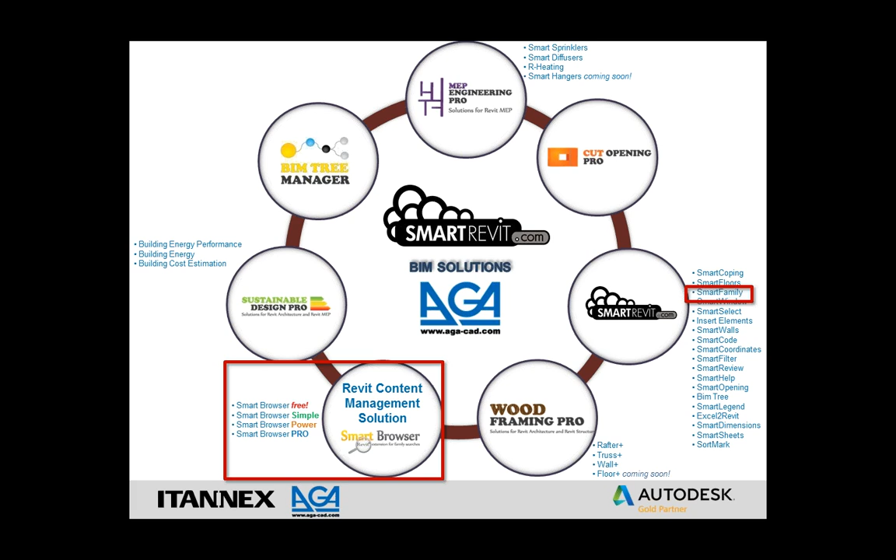So first, if we look into the free version and the Power and Simple versions, all of those 3 products allow designers to quickly and easily browse and find Revit families from the library. It's very easy to take families from the library, get information about the families, about parameters, parameter values, and put that family into the project. As you see from the dialogues, the free, Power and Simple versions are very similar, just the Power and Simple have the additional possibility to check and update families from the library, so it finds the differences between families in the library and families in the project. Later I will show you how it works.

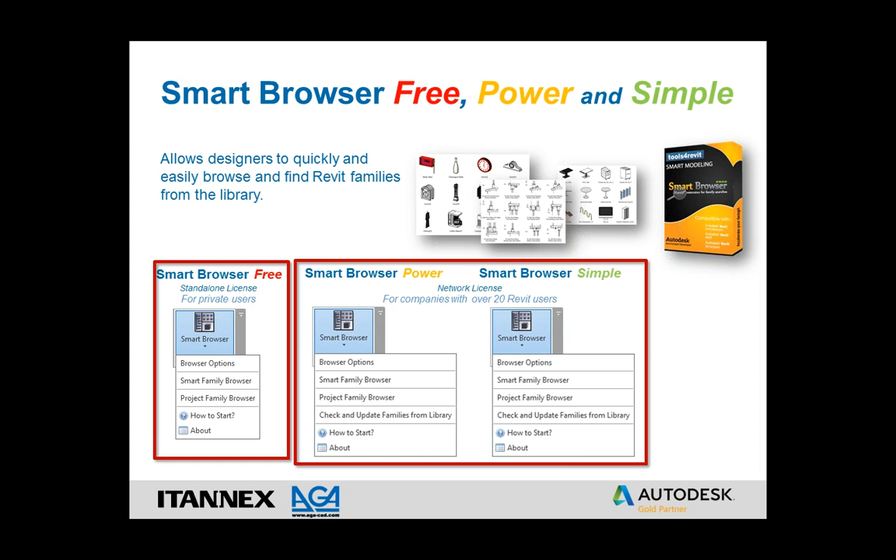So the free version usually goes for standalone users and private users. The Power and Simple versions go for companies, where we have network licenses, so you can do network installations and use network licenses.

Now with the Pro version, you can do all the same things as with the regular Smart Browser, just with the Pro version you can also manage your families. So you can search and manage your families at the same time. You can add additional parameters, change the values, change the types, add formulas, and delete families from the library. So with this product you can very easily find the families in the library and manage them.

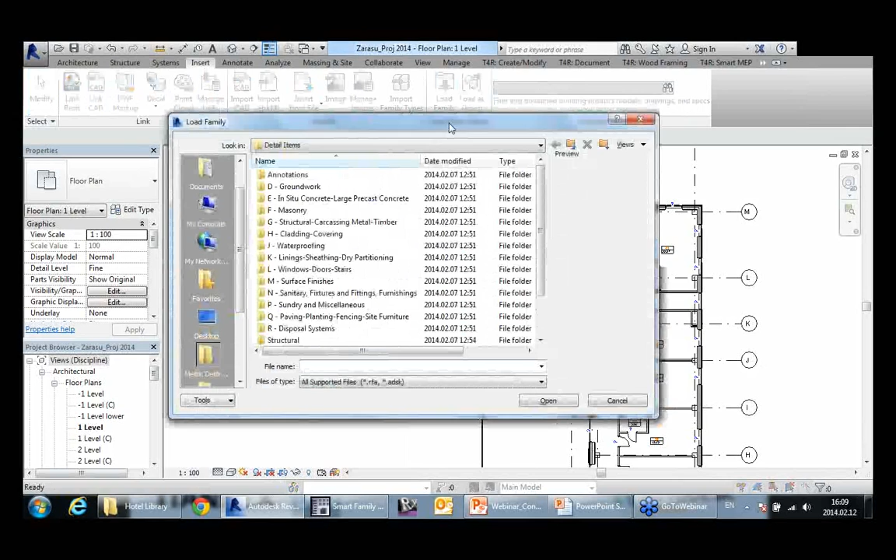Now I'm coming into my Revit. Usually when you start working with Revit and need to insert additional families into your project, you have to go to Insert, Load Family, and select the library you want to analyze. Usually in this dialog, all the families are grouped together according to the catalogs, and you just need to go through the catalogs and find the families.

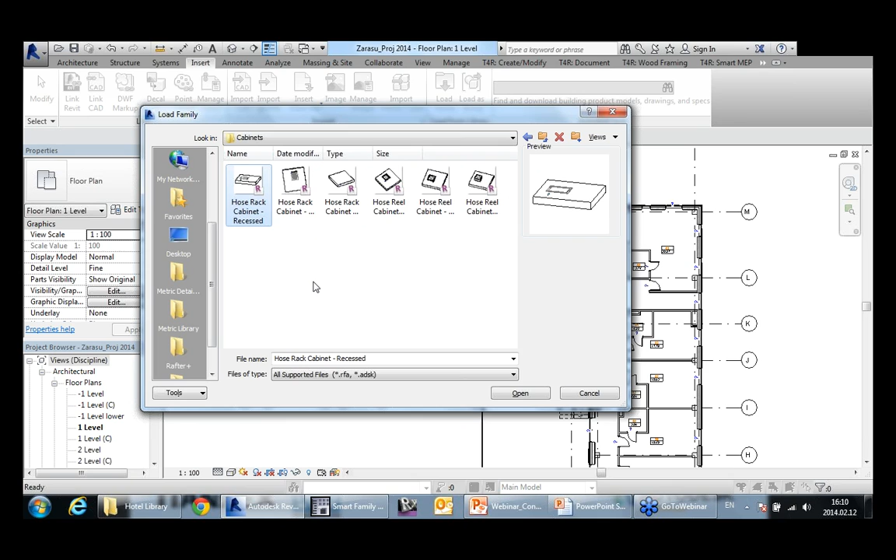Sometimes it's very difficult to get information from the family. You can see only the name of the family and the picture, and that's it. You can't know all the information about the family, about the parameters used in the family, about parameter values, about the formulas, about the host of the family. So instead of that, we suggest having a smart family browser where you can go through the library.

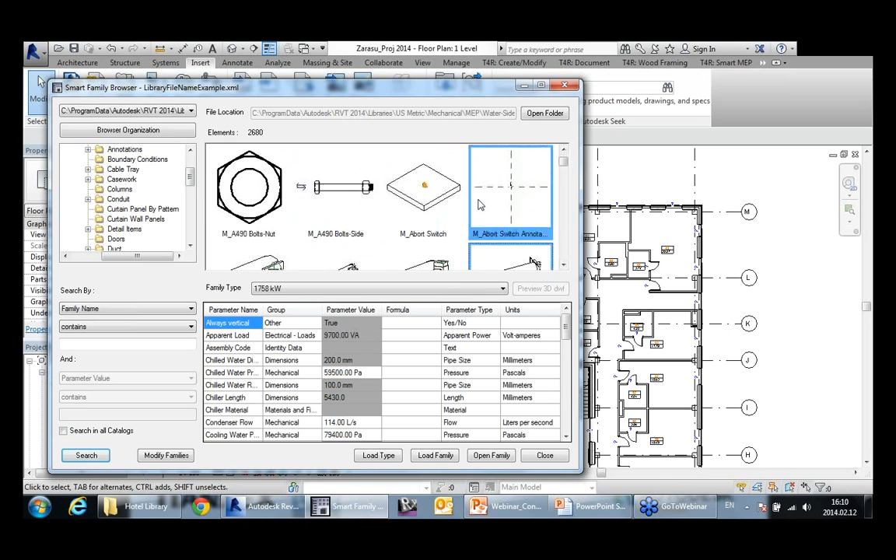Then you can find the elements, and at the same time you can check the family types that are created in the family. You can check the parameters, the groups and parameter values. If there are formulas assigned to the family, you can also see that here, the same as parameter types and units.

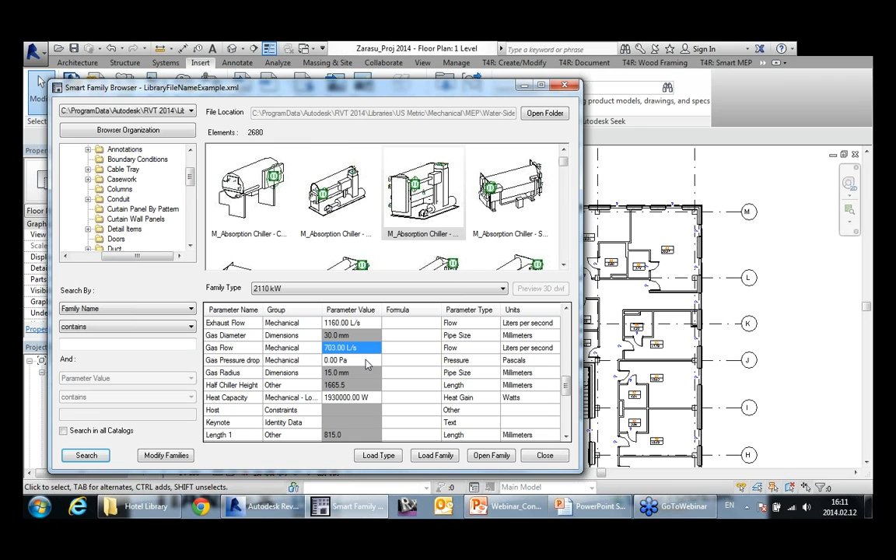Also, if you see that the cells are displayed in gray color, then you know that this value is a type value. If it's white, then you know that this is an instance value, and you will need to change that for every instance used in the project.

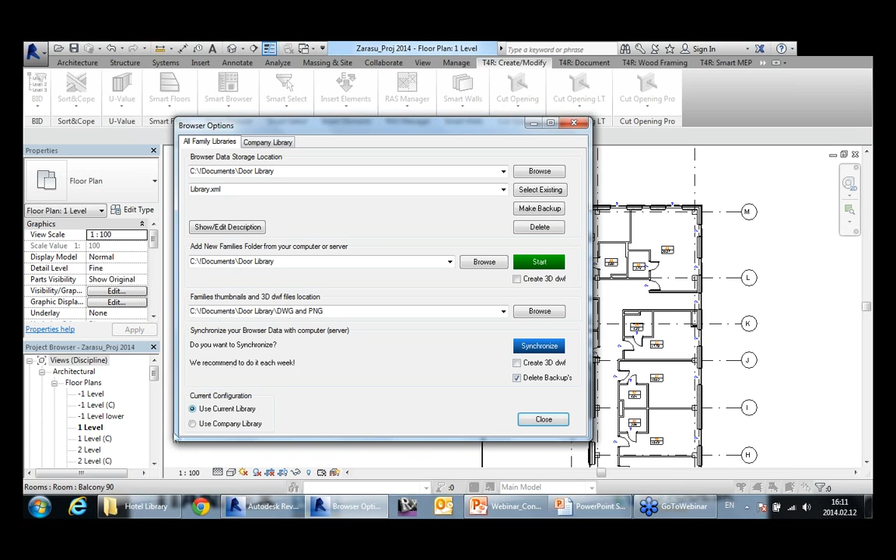So now let's start from the beginning, and I will show how to prepare such a family. Smart Browser Pro you can find in a separate tab, and first we have to go into the browser options. Here you have to say where your library is located. In my catalog here I have about 16 or 17 families, and let's try to prepare those families to use them with the Smart Browser. So here you have to select where your library is located.

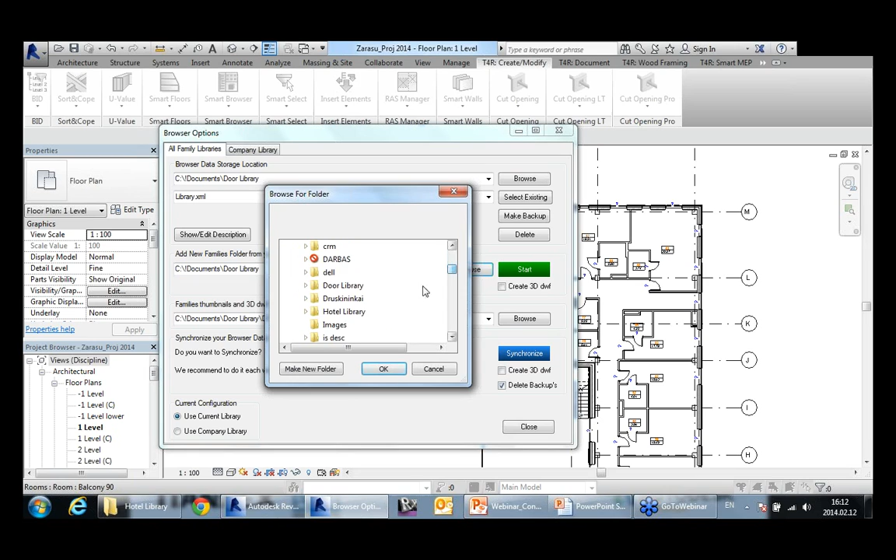Okay, then actually the main button is Start, and after pressing the Start button, the tool will open every family and read all information about the families. That information will be stored in an XML file, and right now I will copy the path to that XML file. The tool will create that XML file, which will have all information about your families, about parameters, parameter values, and so on.

Additionally, the tool will create additional PNG and DWF files. So here you also have to say where those additional files will be stored. Actually, it can be in the same place, or you can create an additional catalog if needed.

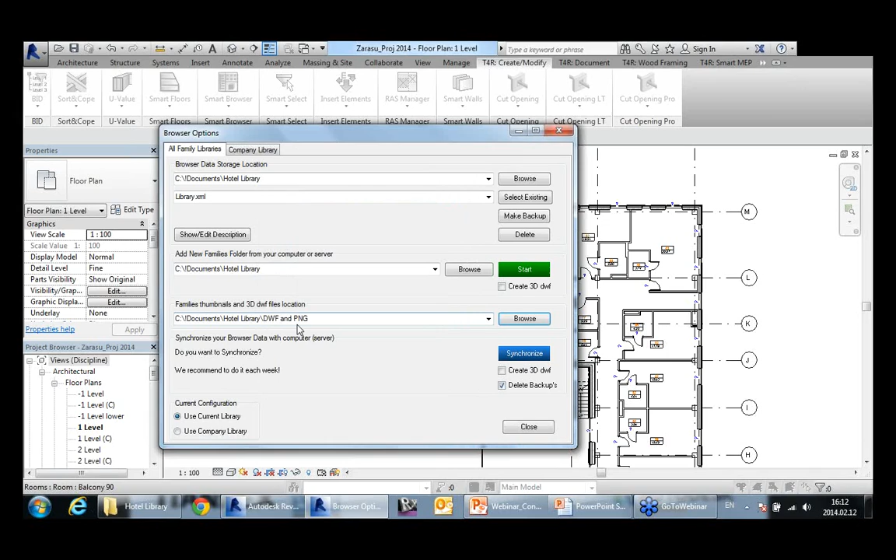You can manage those files wherever you want. You can put together with a library, and save that somewhere in a common location.

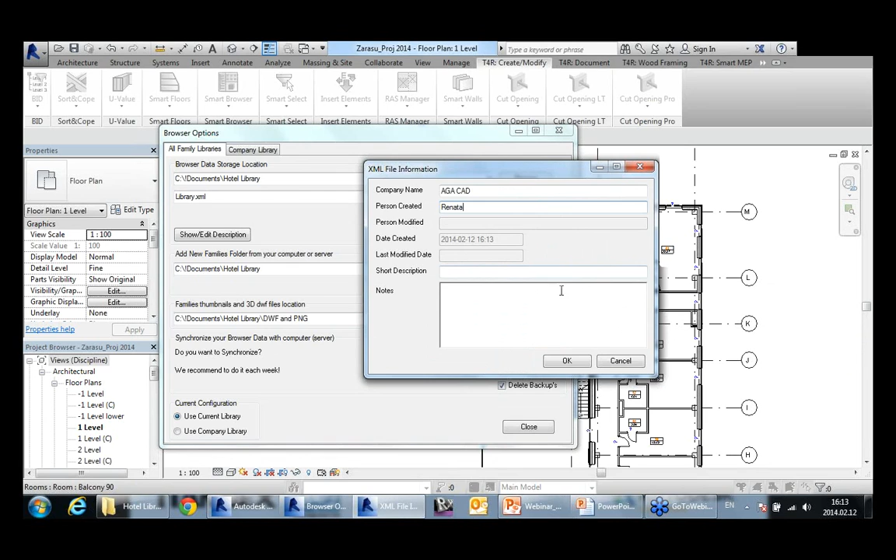After pressing Start, you just have to add the company name and the person name who is trying to create that XML file. After pressing OK, the tool will read all that information about the families.

That process can take some time because the tool opens every family and reads all information. But this process has to be done just one time for one user from the company, so you can leave it running overnight or over the weekend. Just one user from the company has to do that process.

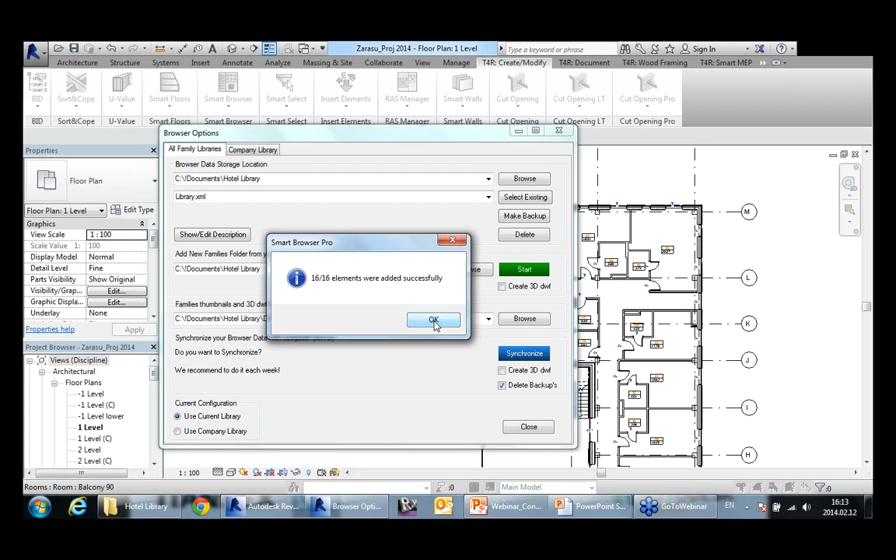All other users can use the same XML file, so it can be shared and stored in a common location. When we are done, we can go to Smart Family Browser and see the content.

We have all those families prepared in the Smart Family Browser, and as you see here, we can get really nice views along with the parameters and parameter values.

If you add additional families to the library, the tool will let you know and give you a message. You will need to press synchronize, and the tool will synchronize the data for you. That process will not take a long time.

That process will be quite fast because the tool will look into the families that were added or modified.

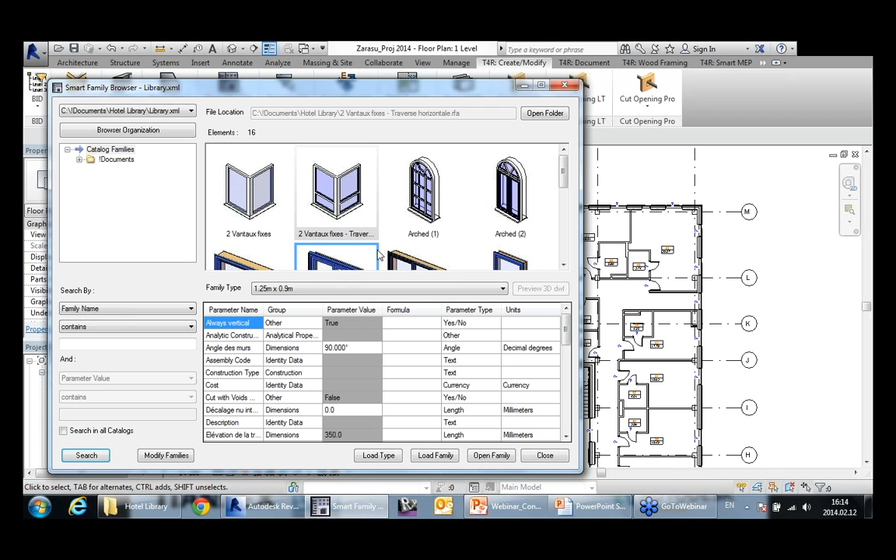Now let's look into the left side of the tree. Here you can see the catalog system as you usually see it with Revit families, but at the same time you can change that setting.

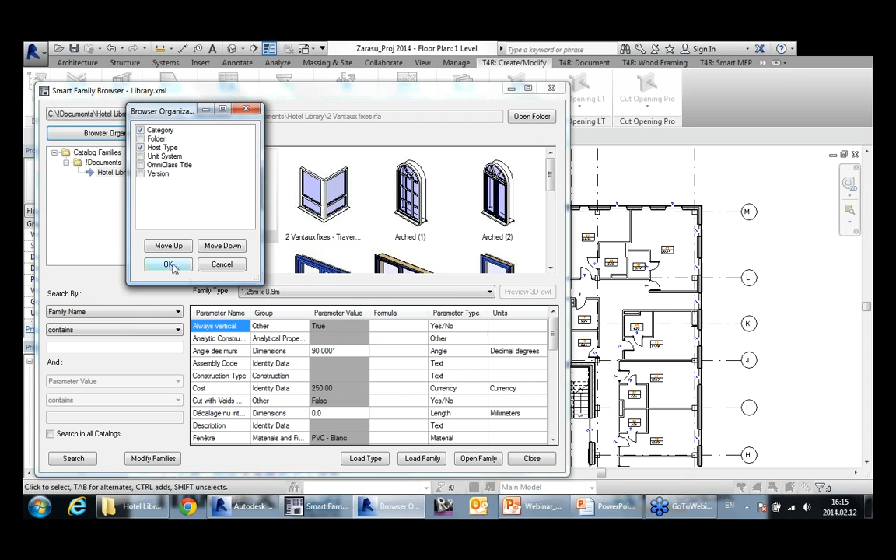You can say you would like to see the category and the host type, or the version, or the unit system, grouping your families according to different scenarios. Right now the tool will group our families according to the real category and then the host of the family, so you can check and see what are the hosts of those families.

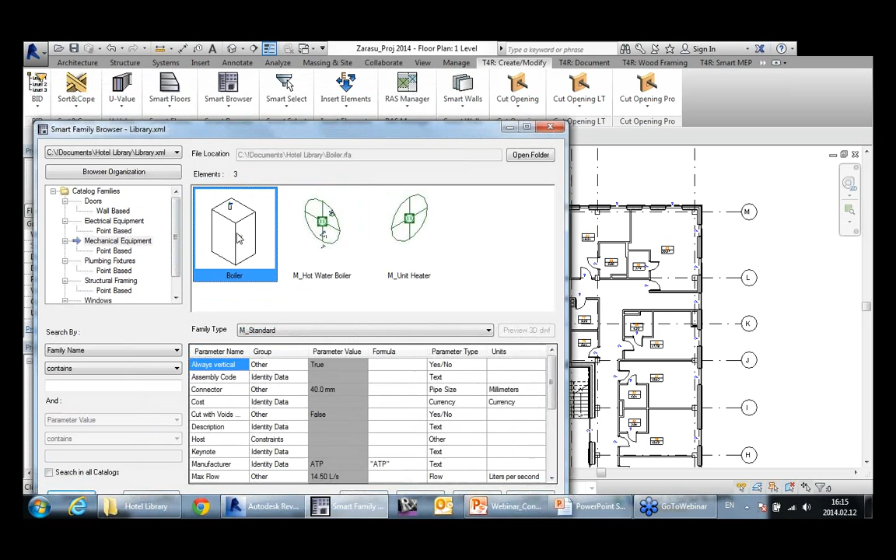When you decide this is the right family and you really want it in your project, you just need to drag and drop to load the family into the project, and it will be automatically selected so you can place it where you want.

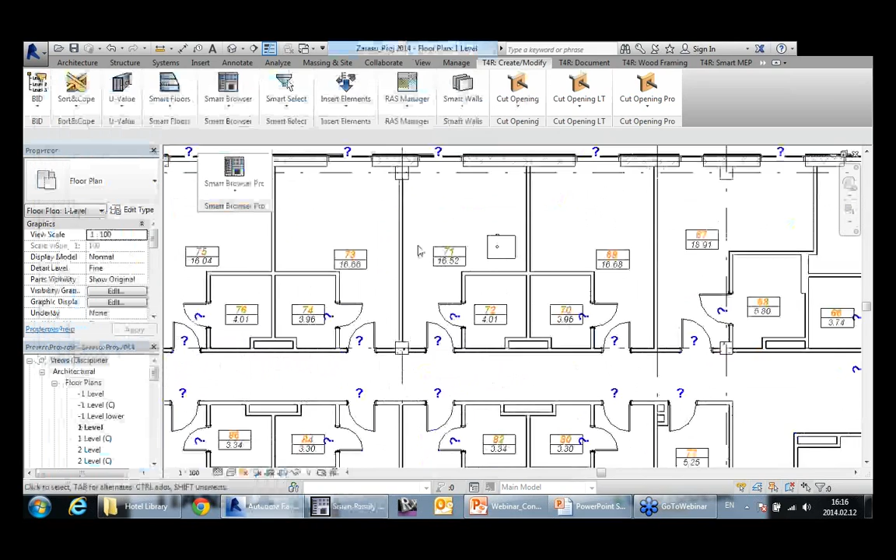What's good here is that Smart Family Browser works like an external application, so you don't need to close the dialog. You can come into the project, work with it, and then continue working with the Smart Family Browser.

Now you can have several libraries. Like in my case, you can have several directions into different libraries. If you have a really huge library, you can split it into separate XML files, or one XML file can have several libraries, several directions into different libraries.

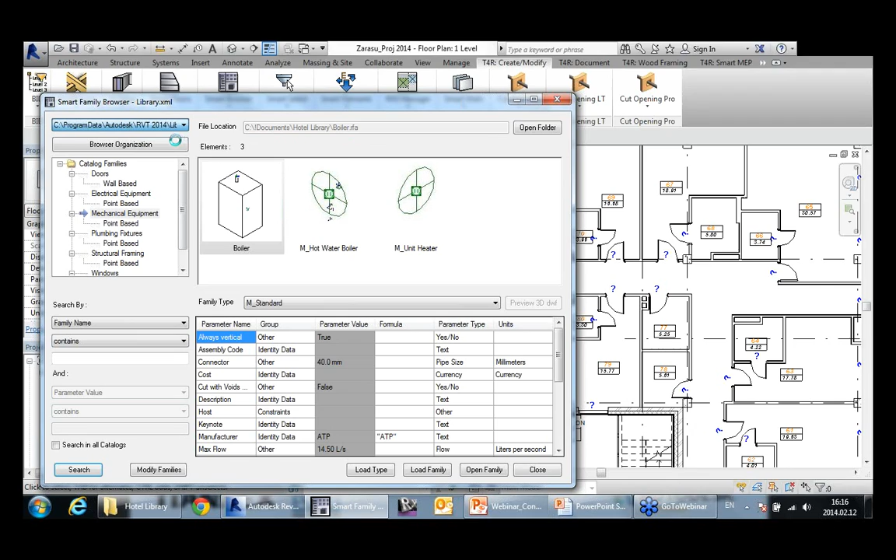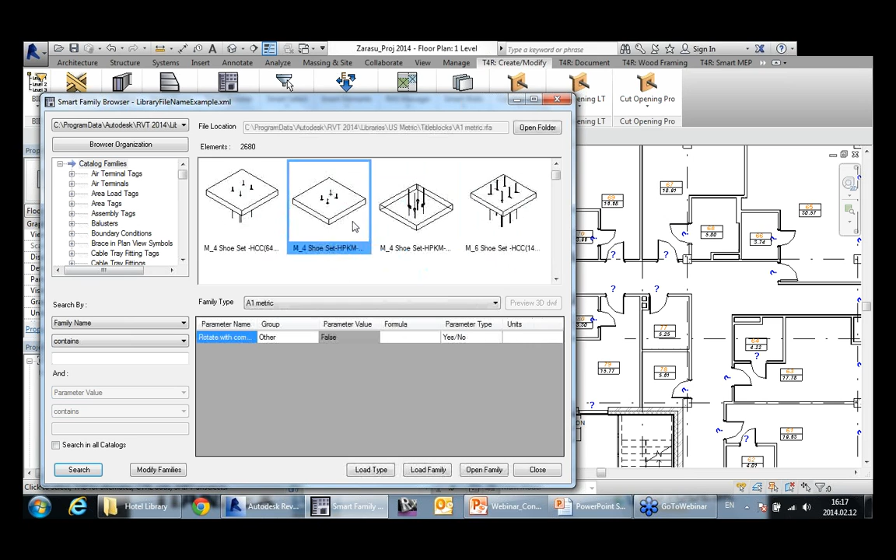Let's look into the Revit library. It has about more than 2,000 different families. Okay, so it's 2,680 families. Again, you can go through them here.

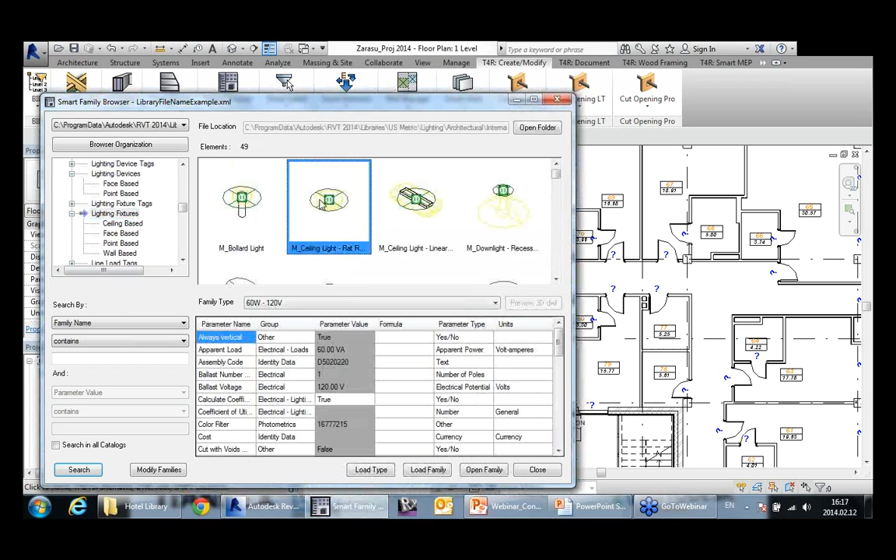At the same time, you can see that the tree was automatically changed, and now you can really look and filter just the elements you want. For example, here we can get lighting fixtures, and here we can see 49 lighting fixtures.

At the same time, you can filter ceiling-based, face-based, point-based, or wall-based families. Because as you see here from the picture, you will never understand that this is really a wall-based family, or for example this one or this one. So with this tool, it will be very easy to know what is the host of the family.

At the same time, you can make an additional search. You can search your families according to family name, family type, parameter name, or even parameter value.

So we can make a search according to parameter name that contains 'material,' and parameter value that, for example, begins with 'metal.' And we can make a search in all the catalogs.

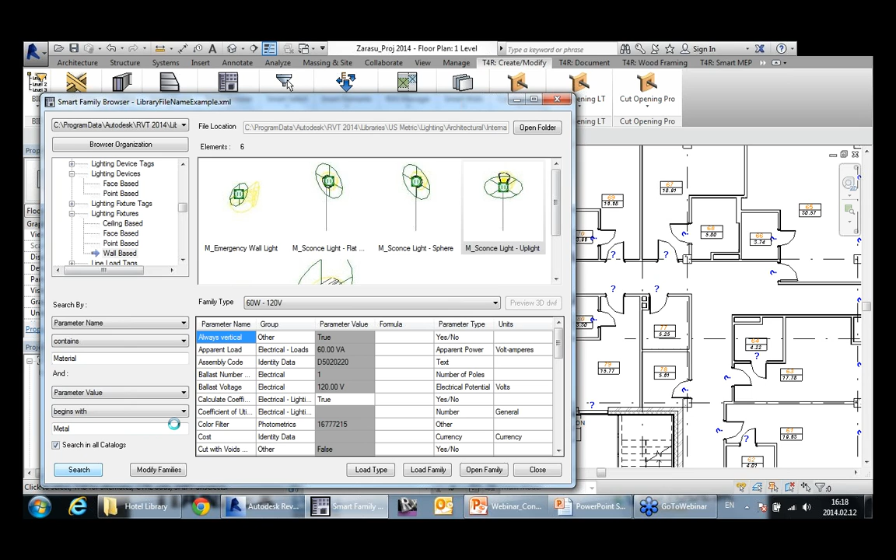We found 162 families, and exactly the tool found elements that contain parameter name 'materials' and begin with the value 'metal.'

So all those features that I'm showing you right now, you can find with all the browsers. It doesn't matter if you use Smart Browser or Smart Browser Pro.

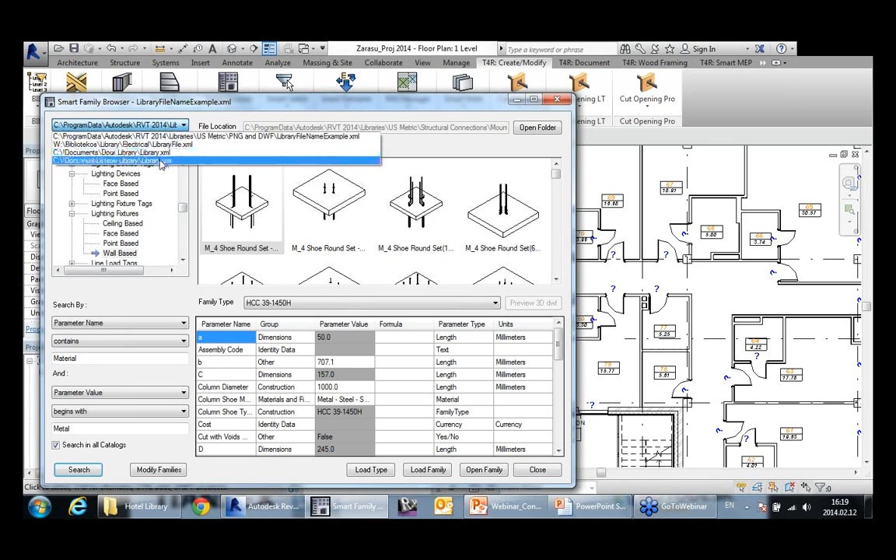Now, with Smart Browser Pro, you can modify the families. It has the possibility to go with right-click and modify the families.

So let's select those families. Let's go to Modify Families. Here we have to add a modification name.

So we are adding the modification name and the person name who is trying to modify those families. If you want, you can add an additional short description about the modification you're planning to do, or short notes.

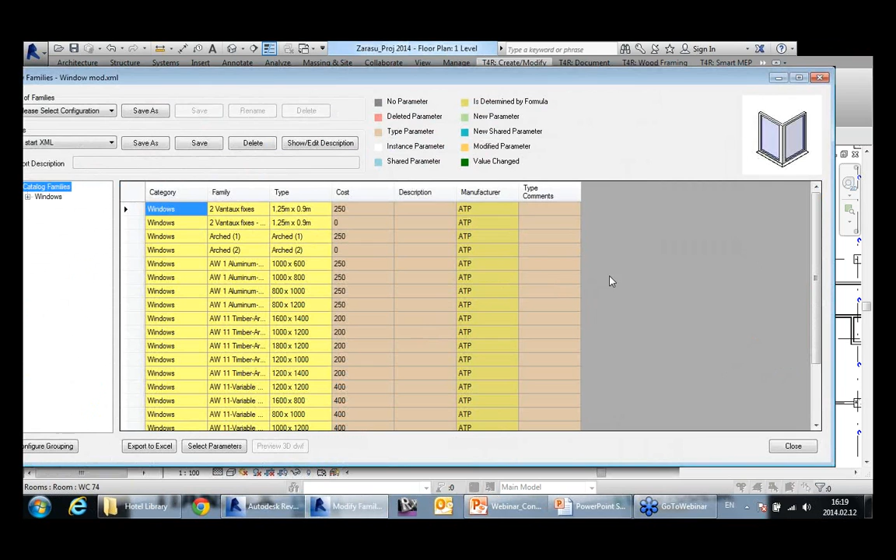And that's it. Here we have the families listed in the separate dialog. Every type will be displayed as a separate row, and in the columns you will see parameter names. Default names will be like cost, description, manufacturer, and type comments.

If you're not satisfied with those parameters, you can go to select parameters and switch on or switch off the parameters you want. On the left side of the tree you will get the list of all

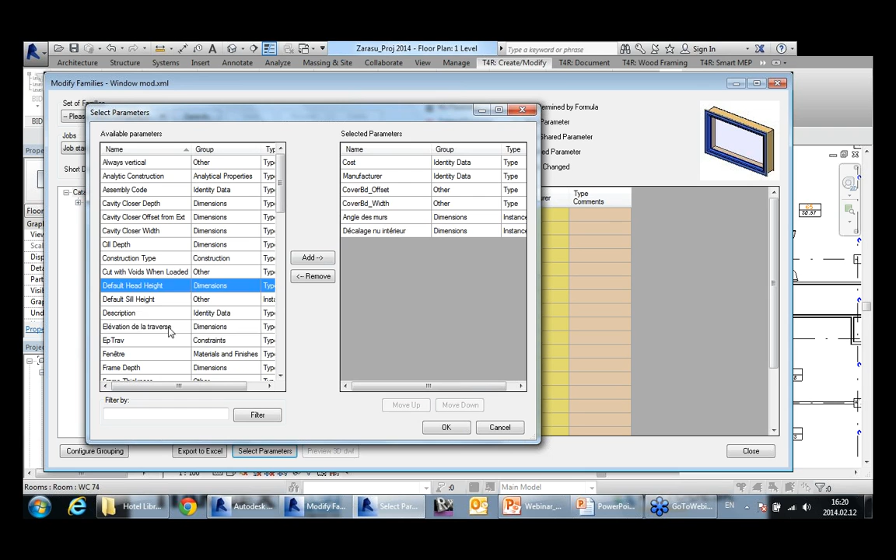parameters that are already used in those families. So you can select parameters, just click OK, and then you will get the situation with those families. It will be very easy for you to understand what's going on with the families.

If that cell is displayed with a gray color, then you know there is no such parameter in that family. If it's displayed with this color, then you know this is a type parameter value. If it's white, then it's instance. If it has a yellow color, then you know this is a parameter that has a formula value. And now you can make changes.

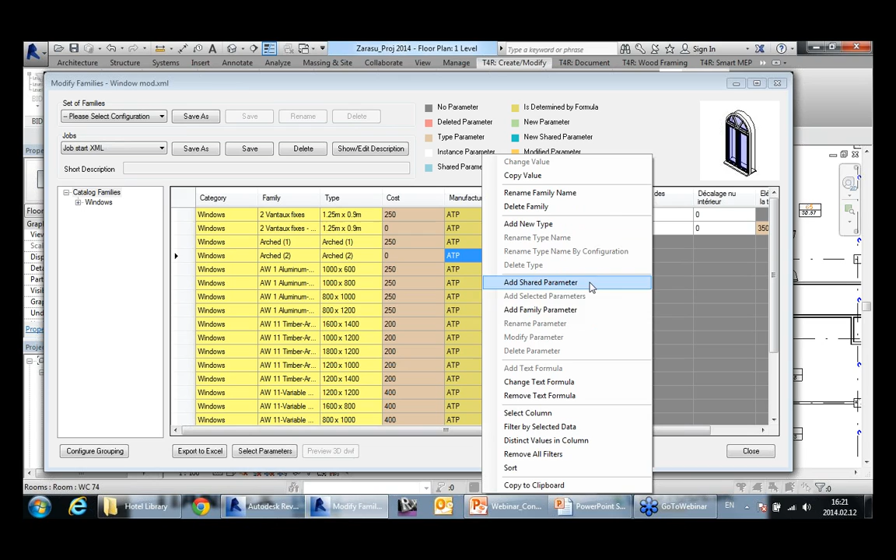You can find all those possibilities with the right-click menu. You can change the values, copy the values from one column to another, rename the families, delete the families, make changes with the type names, add additional parameters, modify them, or even delete them.

Let's say if we don't want to have this parameter here, we can go with right click and say we want to delete such parameter. It will automatically be shown with the red color, so we added a task to delete that parameter.

At the same time, you can make a filter. You can filter the families according to the family name or category, or you can make a filter with right click. You can select the values here, filter by selected data, and then you will get only filtered families, and you can change the value.

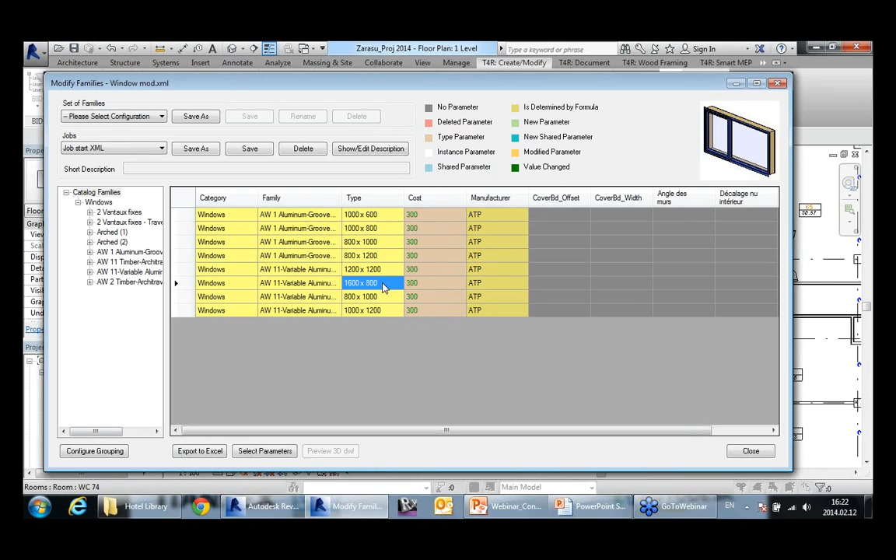So right now, physically, those changes are not done yet. We are just adding the tasks of what we would like to do with the families. In the show and edit description, you will get very detailed information of what changes you are going to do with the families.

Later, we will need to run the process and the tool will change those families physically. Right now, we are just adding the tasks of what we want to do with the families.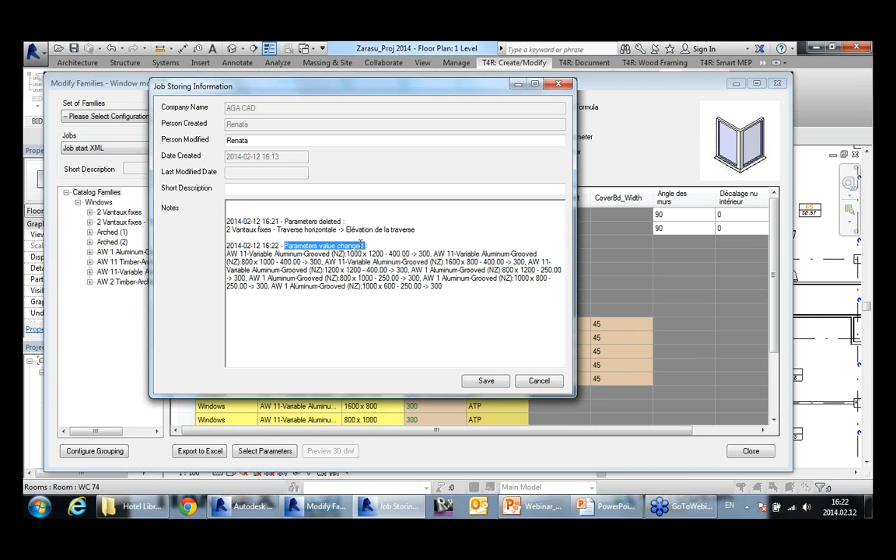So as you see here, we decided to delete the parameter, and after a minute we decided to change the values for those parameters and for those types. So every time you can see what tasks you are adding for your families.

Let's say if that parameter has to be instance, or you want to modify such a parameter, you can go to modify parameter. You can say that this parameter should be instance, or if you want you can change the group of that parameter.

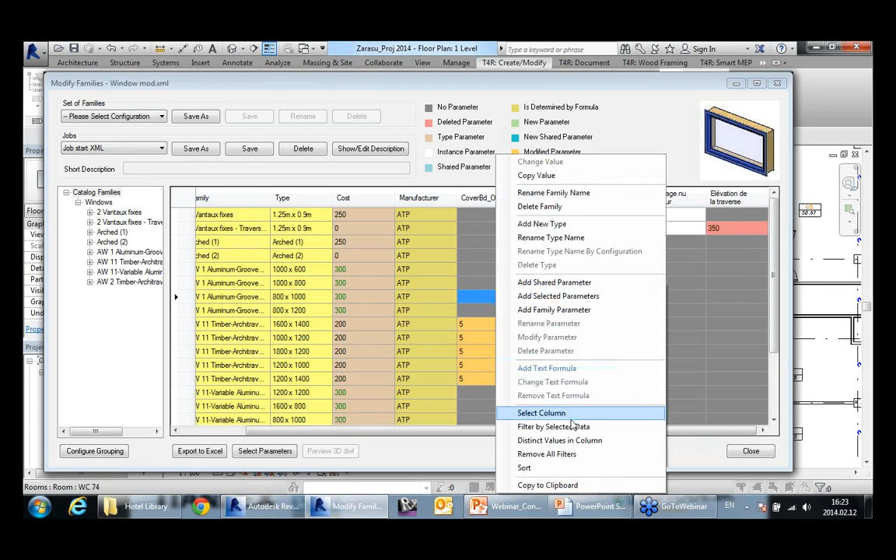Then we can add additional shared parameters. We can filter, select all those families, go with right click, and here we can add additional shared parameters. Here we have to select a shared parameter file, a regular TXT file with shared parameters.

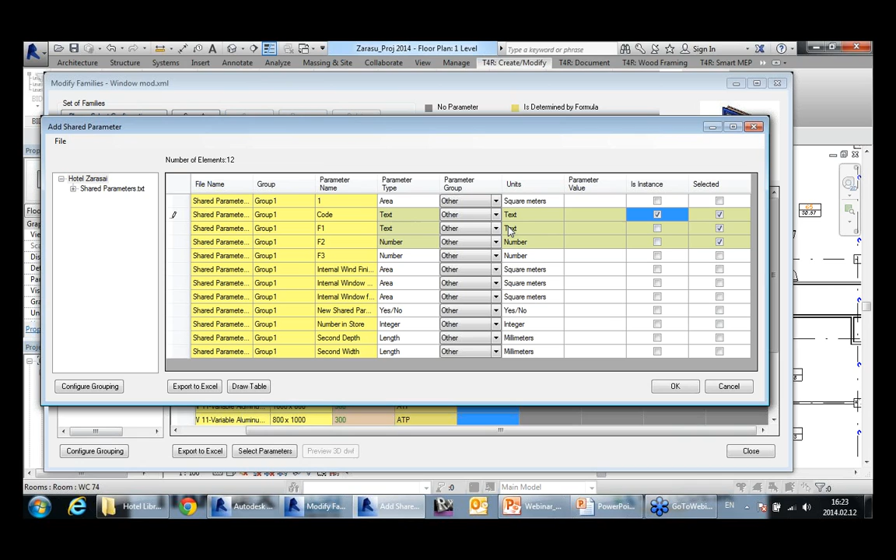And you have to pick the parameters you want to add for your family. For example, this one will be instance. Again, if you want, you can assign additional groups of parameters, and the tool will create those 3 new shared parameters for every family.

At the same time, we will change those values. So with this dialog, it will be very easy to make a standard for your families and to be sure that everything is okay with the families.

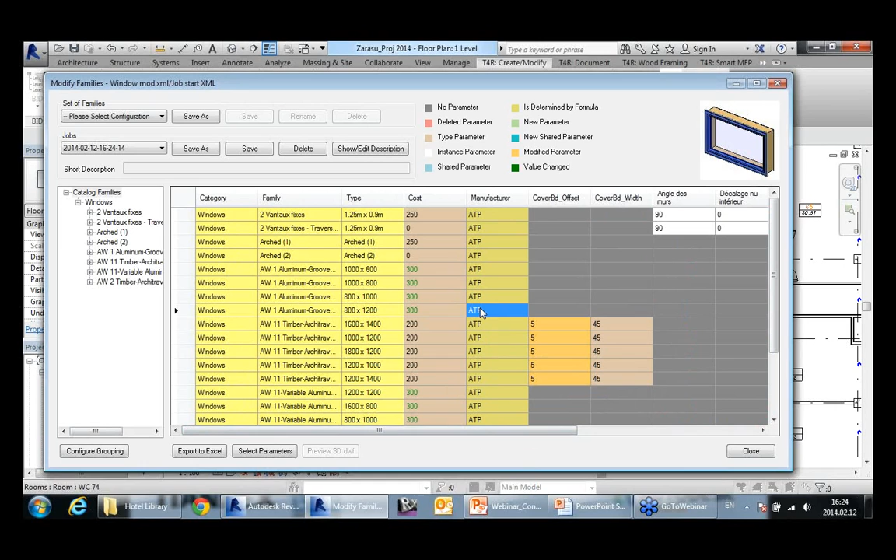Now I will add width and height values, width and height parameters.

Okay, and as we see, here we can check, because we can see the whole situation, whether the family's width and height values really suit the type names. Sometimes if you want to make a standard, it's very difficult because you have to do that manually one by one.

Here you can just make a rule, and assign parameter type names. Actually, if you want, you can just create a new parameter, or just rename the type name. But here I want to show a new possibility we added to the new version of Smart Browser Pro, where

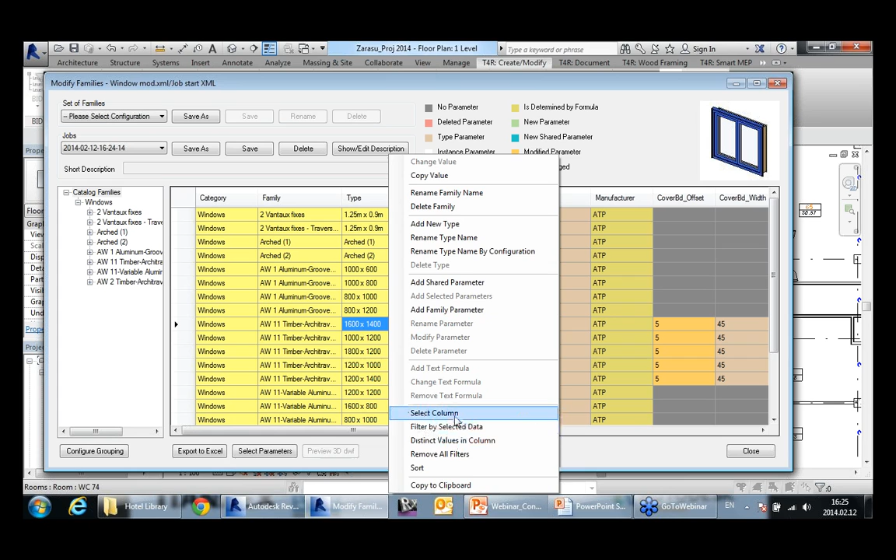you can rename types according to configuration. So I can select all those families, go to rename type name by configuration, and here I can add a configuration for how I would like to create those type names.

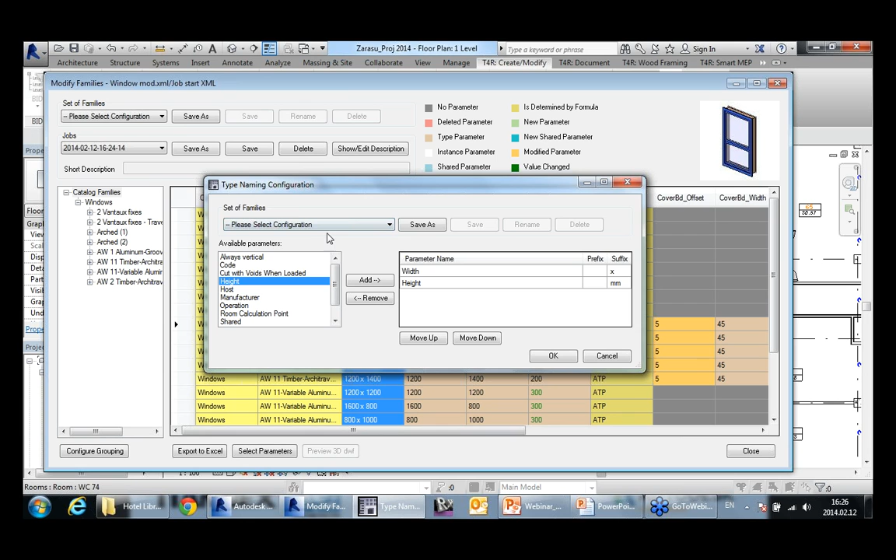Let's say it will be the width, then a suffix like a space, then an X, then space and millimeters at the end. That will be a rule for creating my new type names. Again, you can save that configuration for the future if needed. After pressing OK, the tool will rename those type names according to the width and height values.

So as you see, it will be very easy to make a standard for the type names, and you will not need to do that manually one by one.

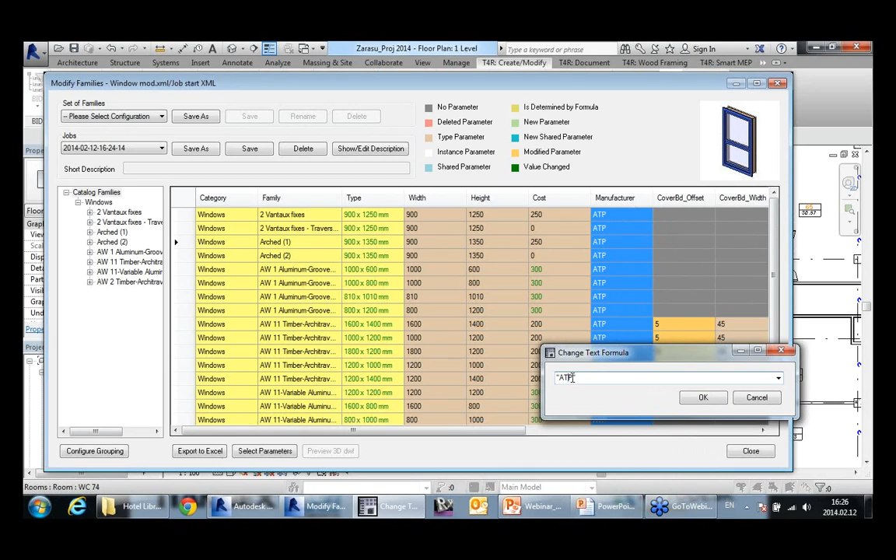The same with the formulas. Right now, this value was created according to the formula. We can select those, go to change the text formula, and here you can assign your own formula for the text.

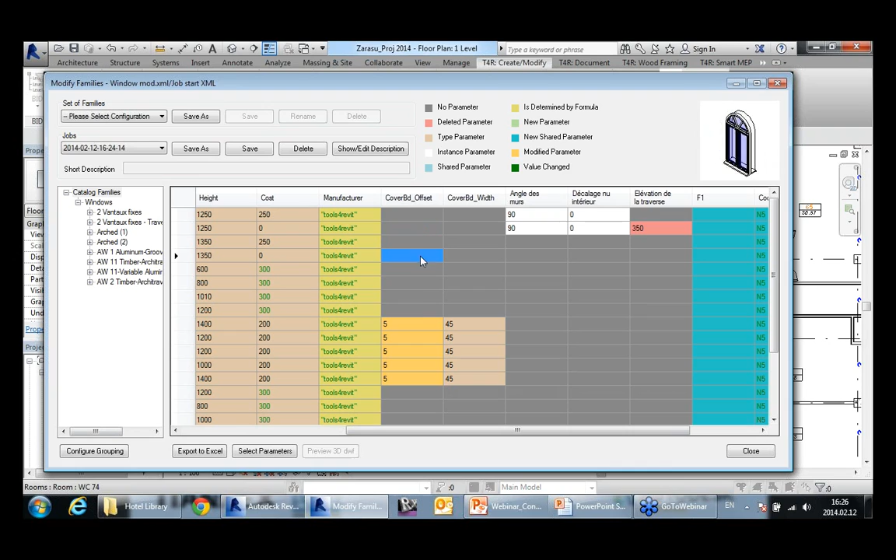So after adding those tasks, one more example I'd like to show is if you want to have those two parameters in those families also, you can select those parameters, press right click, and press add selected parameters. The tool will create new parameters for those families, exactly the same as in those families. So it will be very easy to make a standard and be sure everything is okay with the families and they have all the same parameters and parameter values.

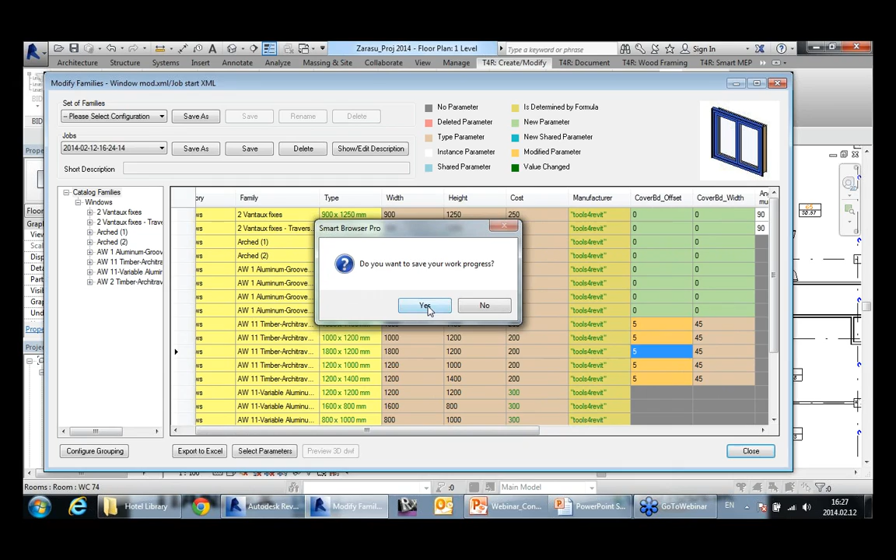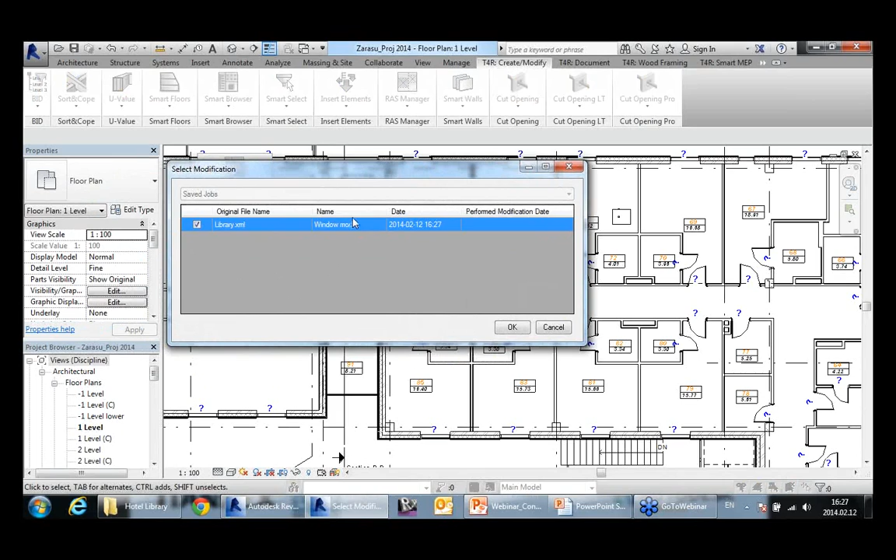So that's it, we can close the dialog. We will save all that process. We can close this dialog as well, and we can run the process. Before that, if you want, you can come back to your modifications, but right now we can just go to run saved modifications. We have to select the modification name that we did before. Right now there's no date here because we didn't run that modification yet.

After pressing OK, the tool will open every family and do those modifications for us. So as you see in this dialog, the tool is saving and changing those families, because it's also making a backup file.

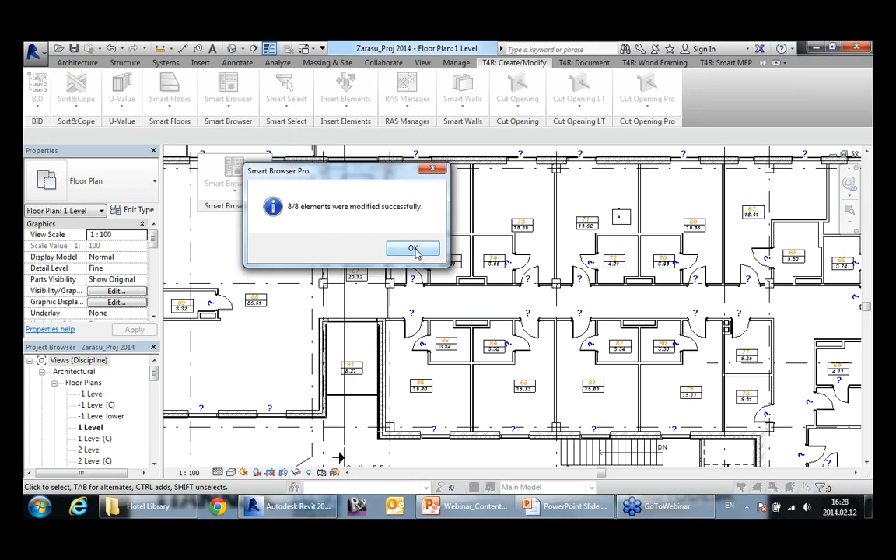Okay, so we're finishing with those families. There are 8 families modified in the project, and we can see that in our dialog, that we already changed those families because here we have the backup files. And when we come back or open the family, we can see those modifications and those changes.

Right now I will open Smart Browser again. Okay, and as you see, the changes are already here. So we can see that the codes, new shared parameters created. Actually, all new shared parameters will be displayed with blue color, so you know that parameter can be added later into the schedule or into the tag.

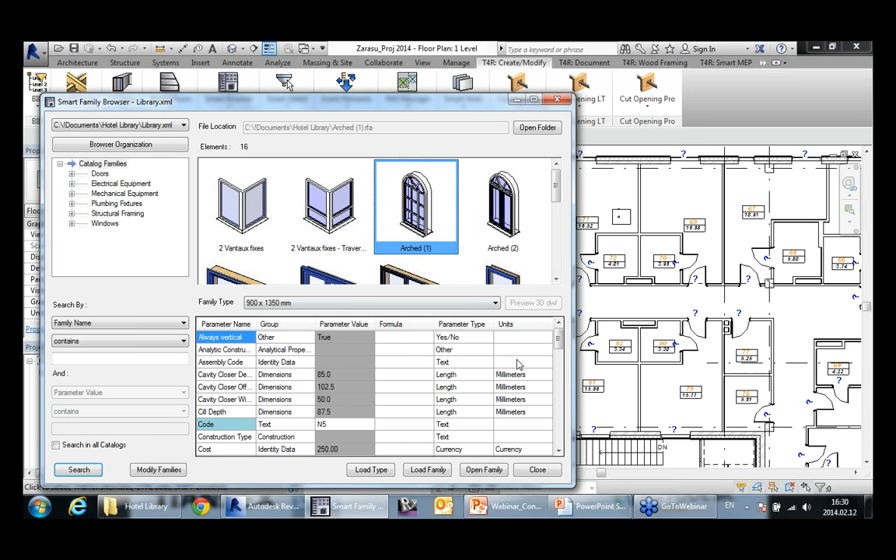So it is instance, displayed with white color, and there are also additional 2 parameters, and the formula was assigned, and the type name was changed for those families. So we can see everything is okay with the families, and you can use those families later in your workflow. And you don't need to make a synchronization process.

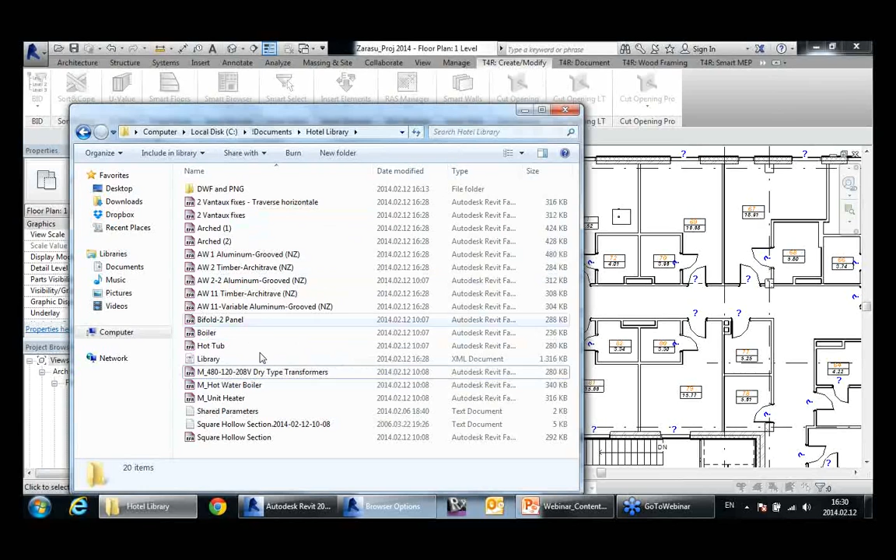Actually, if you are not satisfied with those backup files, you can come back into browser options, and you can synchronize the library with deleting the backup files if it's necessary. So the tool will delete that backup files, and that's it. We don't have them right now at all.

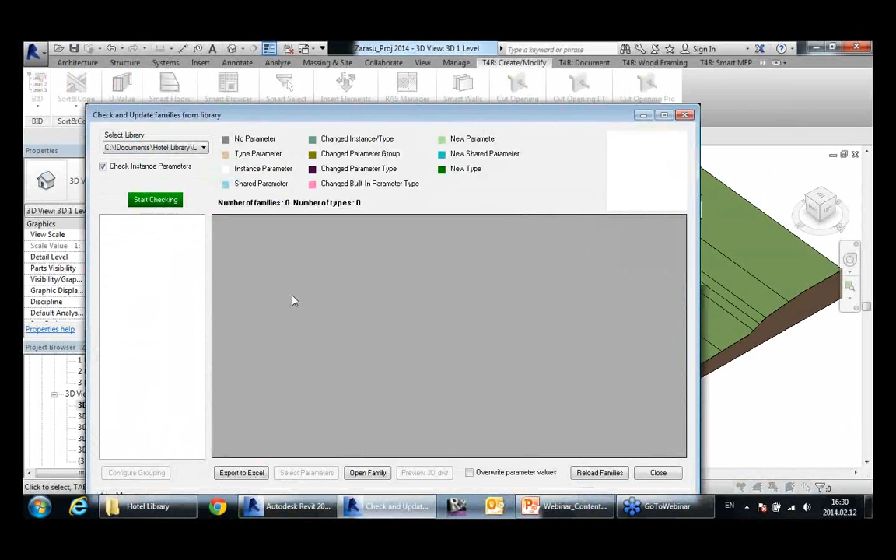One more feature that we have in Smart Browser Pro is that you can find the differences between your current project and the library. Let's say here I have the hotel, and I would like to find differences between the library and my project, because if you want to keep your families updated, you have to reload them into the project. We can select the library and just press Start Checking, and the tool will find differences.

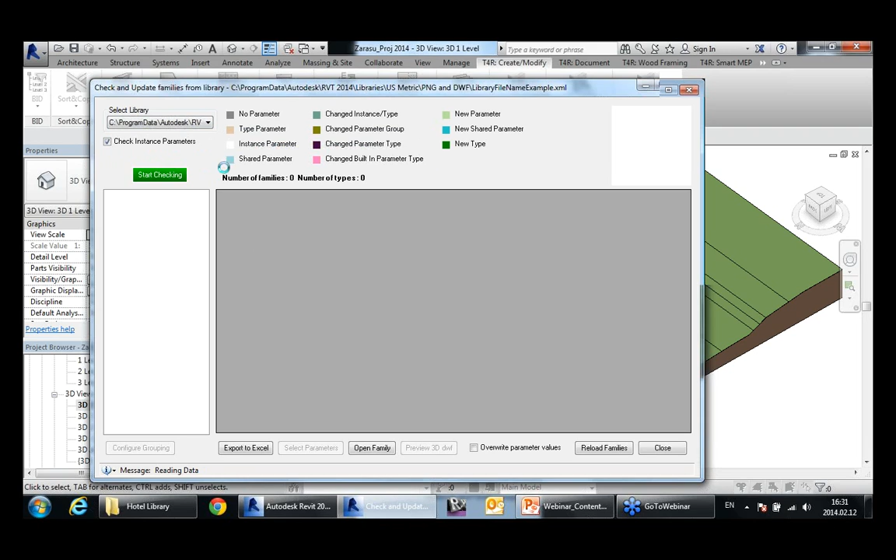Right now there are no differences between the current library, but let's say if I select this one, it's a Revit library with more than 2,000 different families. So after Start Checking, the tool is finding the differences between the current project families and the families from the library. And that's it, here we have the results. There are differences in 25 families and in 57 types, and with different colors you can see those differences.

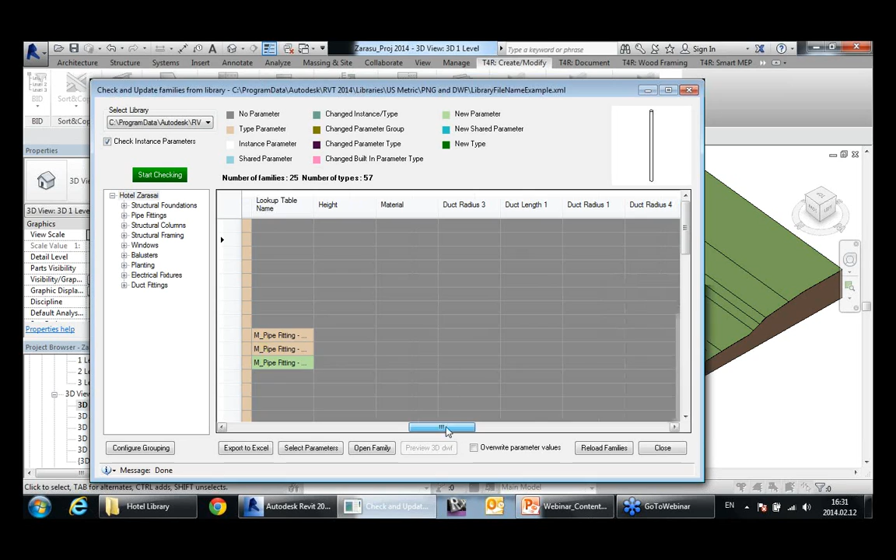And we can see that there are new types created or they are renamed. Also there are new shared parameters, and you can very easily find those differences between the families in the project and the families from the library. And then you can decide what you would like to do. You can overwrite parameter values if necessary, and you can reload the families to the project.

So right now the tool is loading the latest families into your project and changing the values.

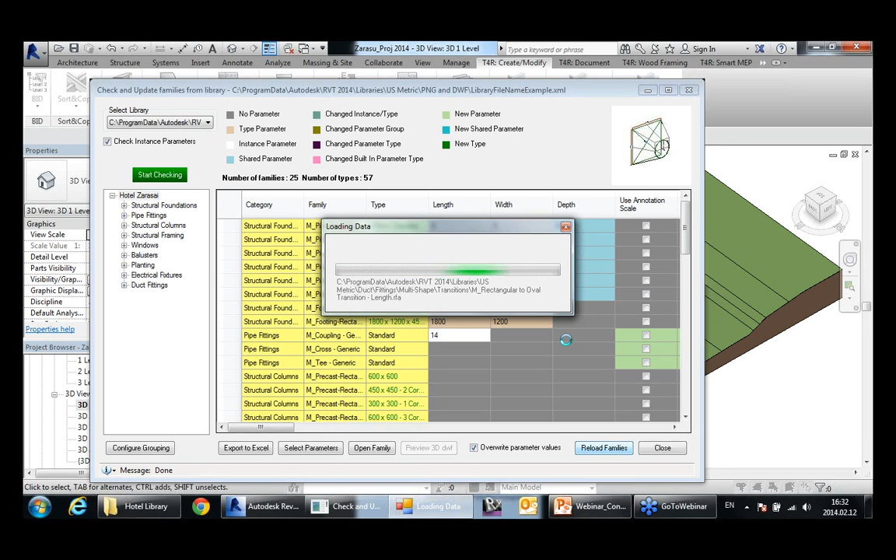Yeah, that's a lot. Right now, maybe some of the values aren't okay. This is a regular message that comes from Revit when you're trying to reload the families. So that's it, there are 25 families reloaded to the project. Now you can be sure that your families are really up to date.

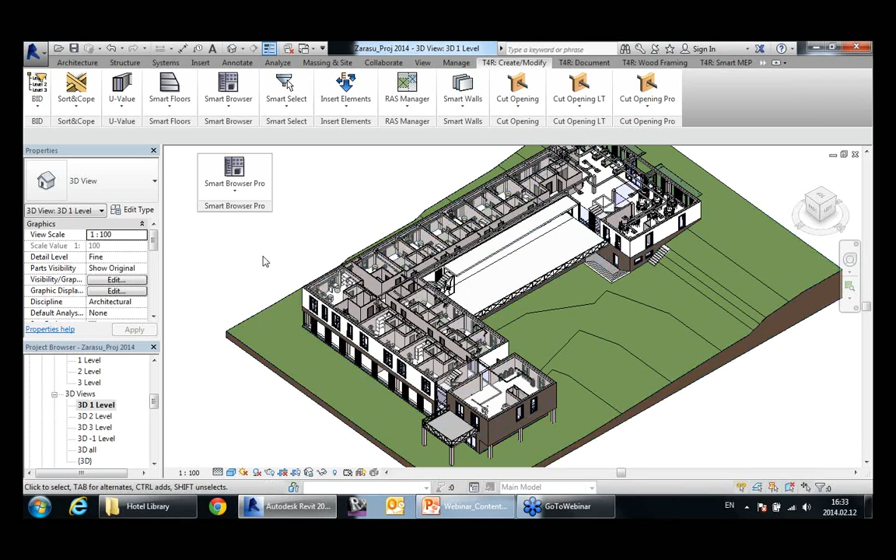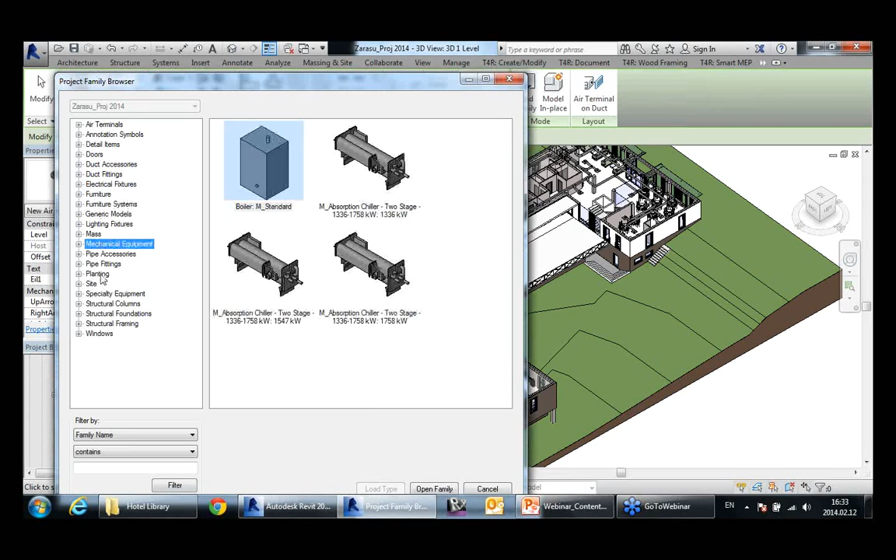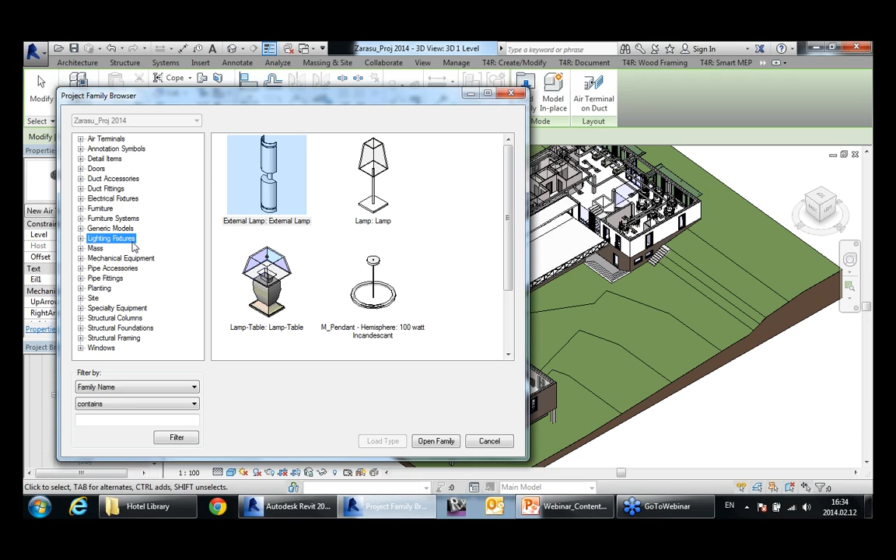One more feature I'd like to show with Smart Browser, or with regular Smart Browser Pro, with all those versions there is a possibility to see the Project Family Browser. This is one more browser that shows the families already loaded into your current project. Here you can easily find the families, and with this dialog it's easy to search by family name and type, and all those families will be grouped together according to their real category. With regular Revit all the families are under one component functionality, but here you can see the real categories.

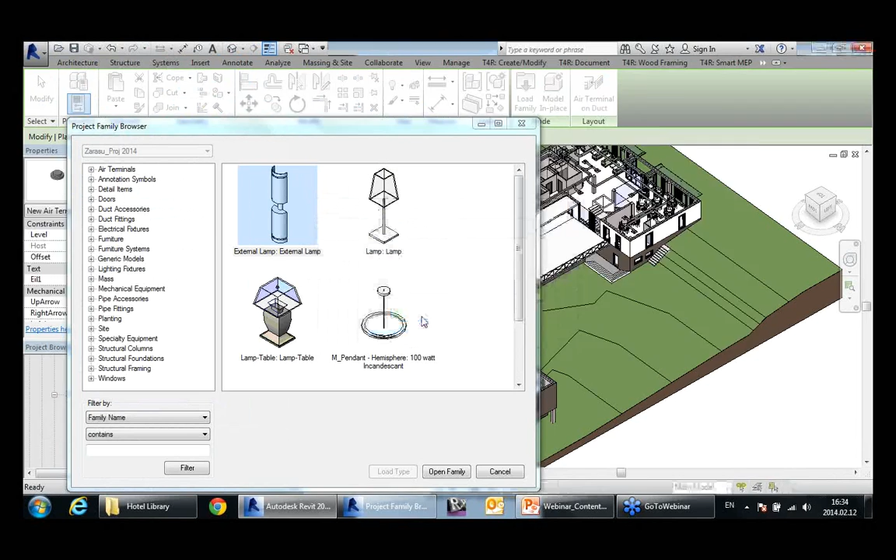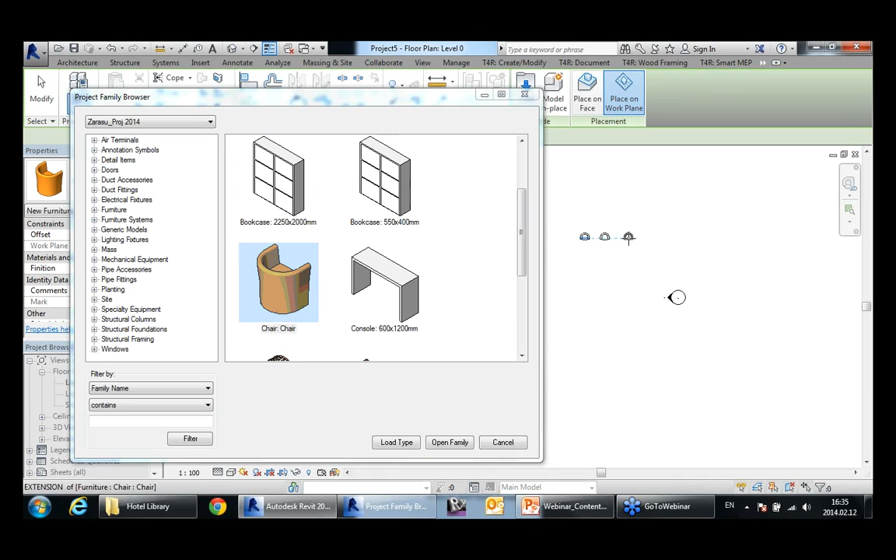I want to show one more very good feature. When you want to transfer families from one project to another, let's say I open a new project. With Project Family Browser you can see the families from the current project, but at the same time you can switch to the previous project. So it would be very easy to transfer families from one project to another. It's just a very easy way to transfer families from the previous project to your current project.

Let's go back to the slides. The Smart Browser Pro's biggest benefits are under that menu where you can modify the families, add tasks to your families for what you'd like to do with them, and the tool will make those changes automatically for you. You won't need to make those changes manually one by one. This is the biggest advantage of Smart Browser Pro.

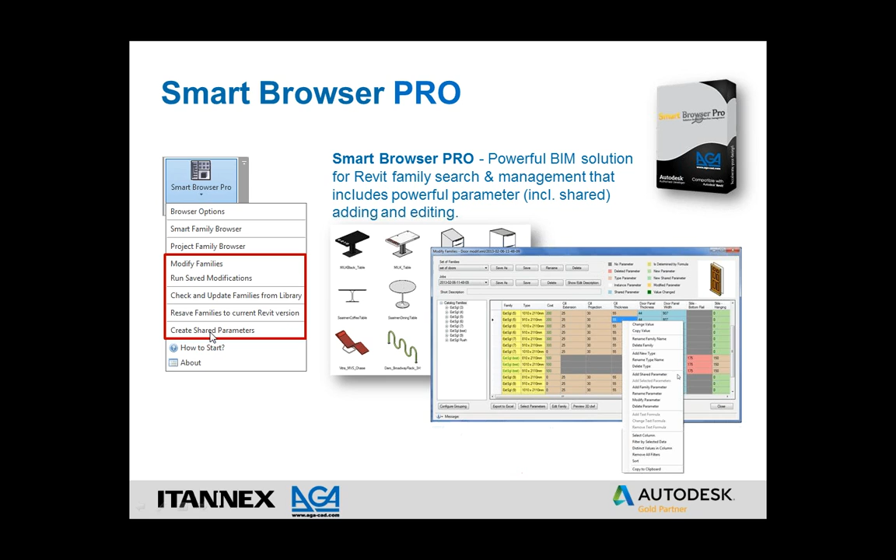At the same time, you can find the differences between the families in the library and families in the project. There are also small functionalities where you can resave families to the current Revit version, and you can create shared parameters for the families used in your project.

So let's try to find out what would be the solution for companies. We can suggest the Power and Simple versions, and here I'll try to explain the differences between Power, Simple, and Pro.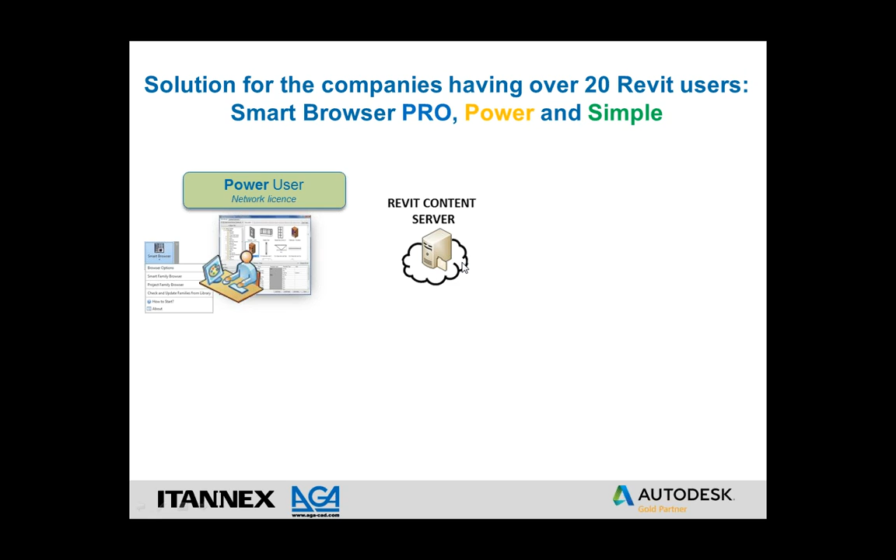Let's say the company has a library located somewhere on the network, in a common location. Here we have Power users. The power users, as you see, can find the families and go through the library. At the same time they can synchronize the library, update the XML file, make changes to the library, or create their own XML files if necessary.

Then we have Simple users. The simple users have the same functionality, but they can only use the company library, and they can't make any changes to it. They can't synchronize the library and they can't change that.

And the Pro users can do all the same things. They can create XML files and synchronize them, but at the same time they can modify the families. They can do all the same things I was showing you today.

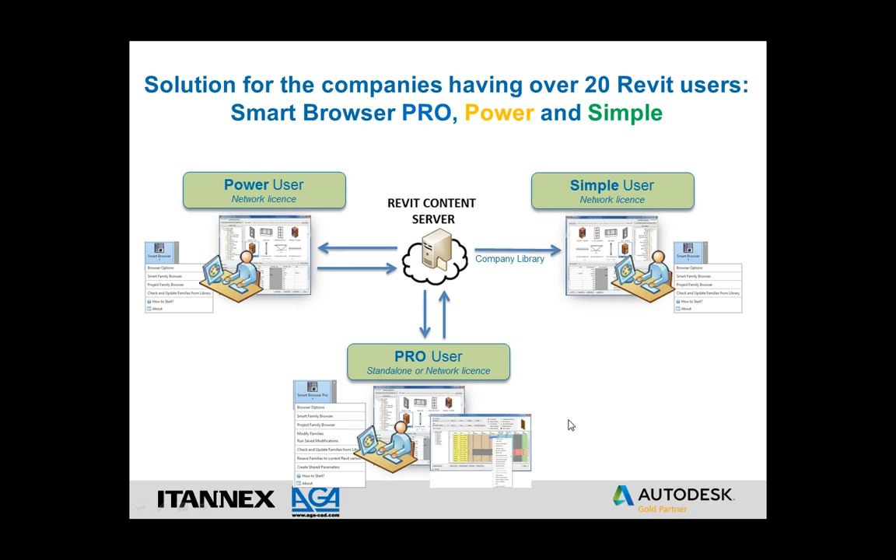So let's say company X has 100 Revit users. It's recommended that about 10 users would be Power users, about 3 users would be Pro users because they'll be allowed to change the families, and all others will be Simple users.

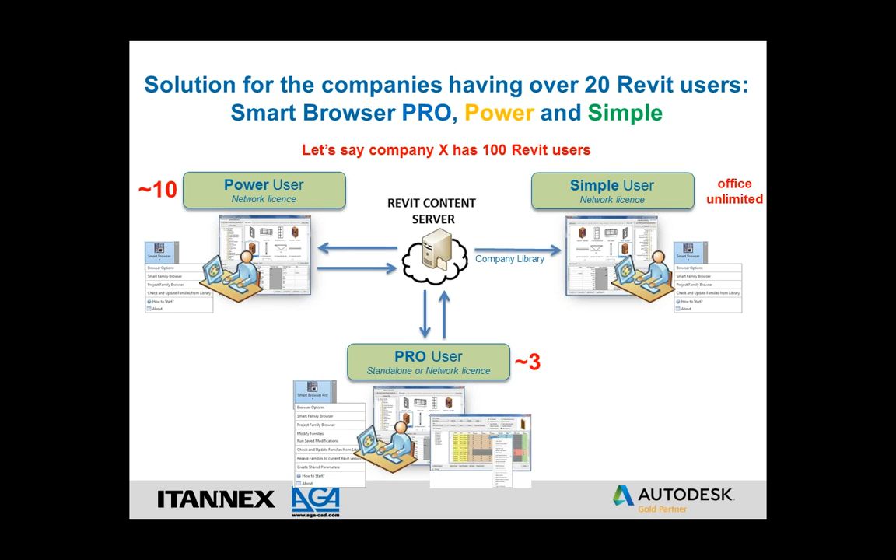If we look closer into the Simple Smart Browser, it allows you to find the families and to browse and use the company library. As you see here, the browser options are limited. The difference between Simple and Power is only in the browser options. In Smart Browser Simple, you can just select the XML file, that's it.

And the Power user can do all the same things I was showing you today. They can create a new XML file, synchronize the XML file if necessary. They have all the same options as the Pro user and as the Power user.